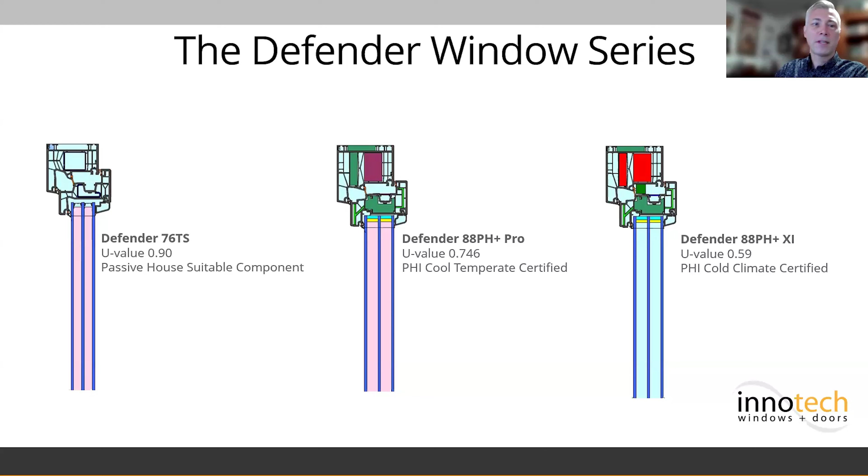Given our niche market, we know U-values. In fact, we'd like to think that our U-values are fairly impressive. But time and time again, we will hear the following: manufacturer X has a lower U-value. Well, do they really? Maybe, maybe not. Let's take a look.

So our goal with any high performance building is to limit the thermal loss from the inside of the building to the exterior. Heating or cooling the buildings, we don't want to heat or cool the outside at the same time. The U value is measuring the heat flow through the window, so the lower the value, the better, because that means less heat is flowing through.

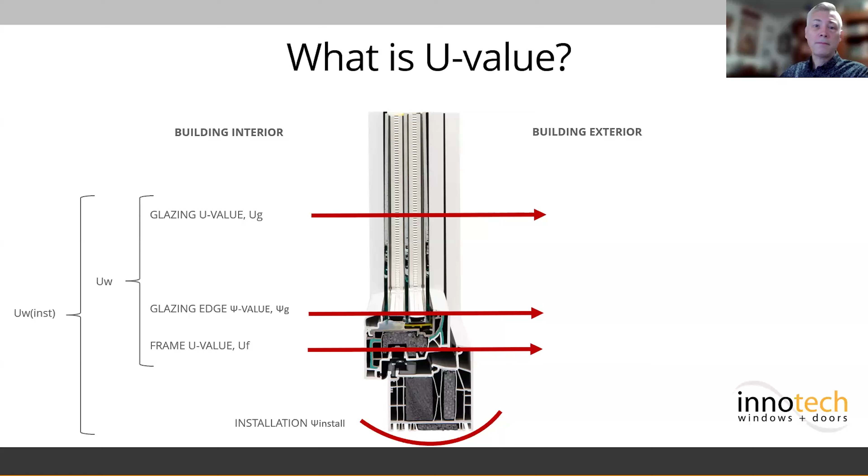The UW, the window value, measures the insulating value of glazing, glazing edge, and frame. UW installed includes the installation value. We'll chat a bit more about that later.

So first things first, we do need to understand U values and how they're determined. Here in North America, we may encounter 3 different ways to calculate U values. Those systems have different surface films, different boundary conditions, and they follow different methodologies for calculating U values.

Note in here, so we've got NFRC, which is the North American system - it actually references an ISO standard for calculation, but a different one than what the Europeans use. It's a very comprehensive calculation procedure based on heat transfer relationships solved using numerical methods.

And it also uses, of course, these different boundary conditions. So we're talking 0 degree Fahrenheit, minus 18 Celsius, up to 21 Celsius, which is 70 degrees Fahrenheit as the interior temperature. It's a very broad temperature range compared to the typical European ISO, which is 0C or 32 Fahrenheit up to 20C, 68 Fahrenheit.

And then Passive House has a very similar system to ISO with some slight variations and different boundary conditions again. So we're going with a frame evaluation at minus 10C, which is 14 Fahrenheit. And the IGU is actually evaluated, depending on what climate it's evaluated in, down to minus 7C or 20 Fahrenheit.

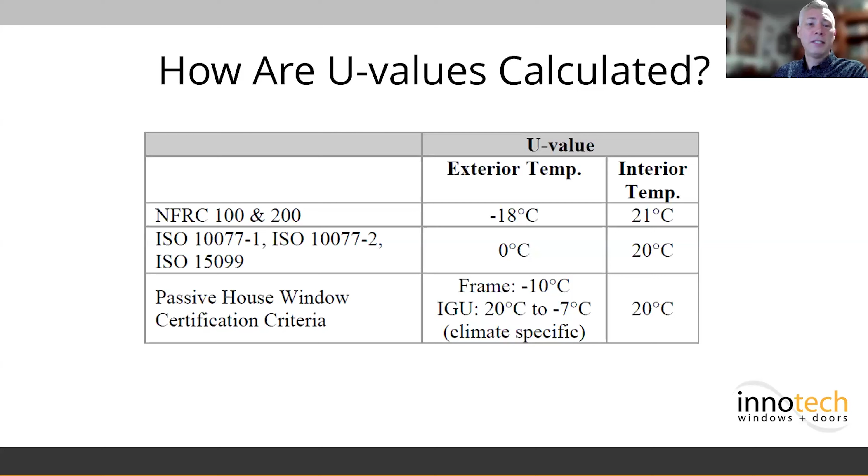So there are some differences in there, and they will alter the effect when we thermally simulate. Another thing to note is that NFRC evaluations are always whole window. They are looking at a fairly complicated window, but they are taking a specific glazing configuration in the frame all at once, so you get one number for that product.

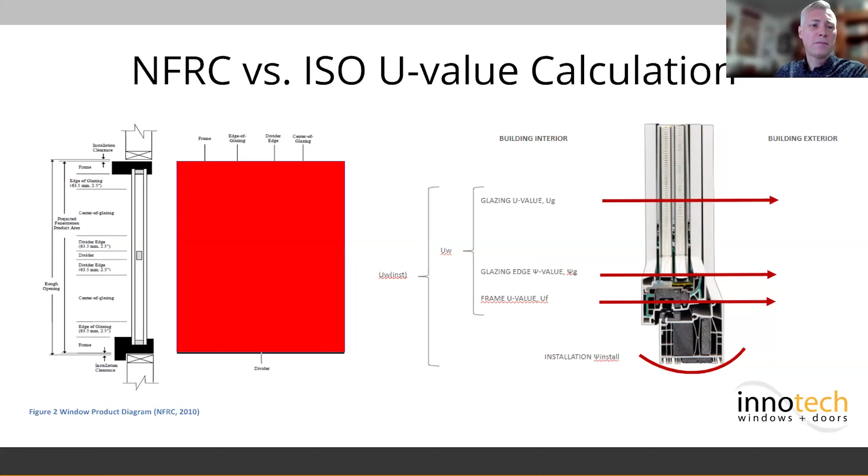ISO, of course, the procedure simulates the U value by putting a standardized panel, a calibration panel, at 0.035 watts per meter Kelvin. And it standardizes the conditions. You get your U frame value, you get your glazing edge value, you get your glazing value, you get an installation psi value, and all of those different parts are put together in the final product.

And when we talk about solar heat gain, interestingly, it's also evaluated differently based on NFRC, ISO, or PHI. So they have different boundary conditions. The exterior temp is going to be 90 Fahrenheit or 32C or 86 Fahrenheit for the European evaluations. The interior temp is very, very similar.

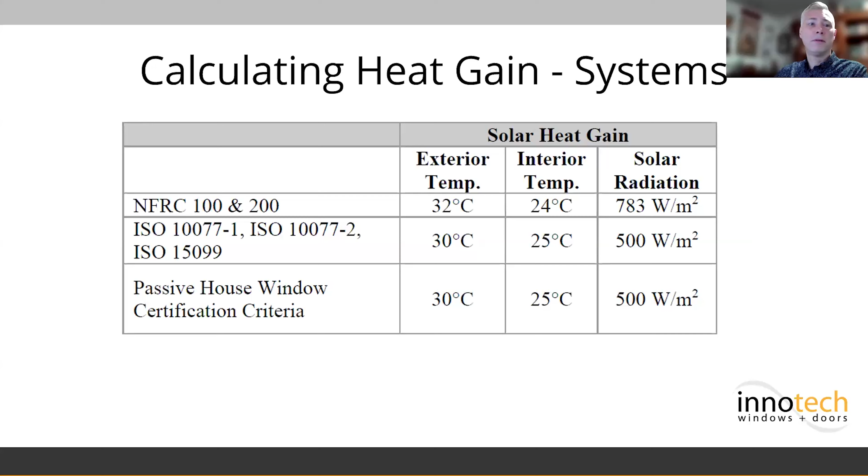Another thing that's a big difference is they have a different incident solar radiation. So they actually compare using different incoming heat values. So you will find different numbers, even with that seemingly simple calculation. As with U value, NFRC solar heat gain is a whole window value.

So that's an important difference since center of glass values are higher than whole window values because of the opaque frame area reducing solar heat gain when you look at the whole window. So NFRC evaluates the whole window. The European ISO can evaluate the whole window or center of glass. Passive House only evaluates from a center of glass.

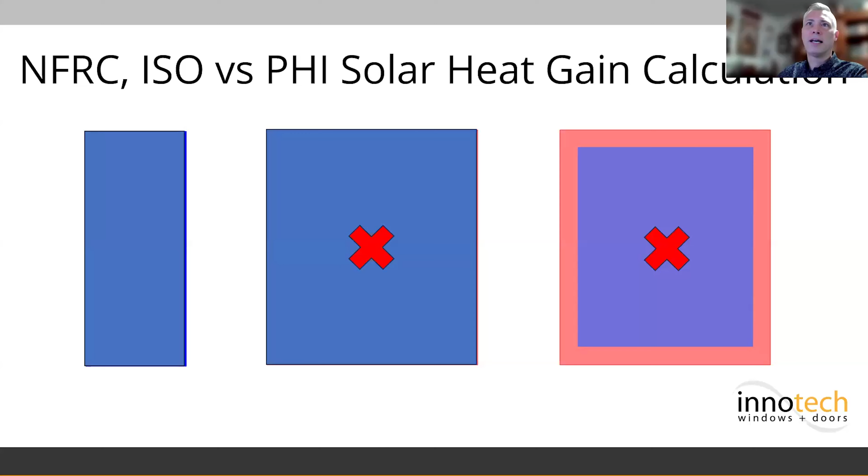Now, does size matter? What's interesting when you take a look at the NFRC evaluation method, smaller windows will generally tend to perform worse in energy evaluations or heat loss evaluations because there's less glass, and the glass typically outperforms the frame. So windows that have smaller frames will actually look like they perform better in NFRC because they have a higher glass to frame ratio, but those small frames are likely to have poor thermal performance.

So that's probably not what you're going to be looking for if you're designing or building to a higher performance standard and paying attention to surface temperatures, condensation risk, that sort of thing.

And the size that the products are evaluated at - if you take a standard window size, NFRC only uses this specific size, this narrow little arrow slit window: the 23.5 inch by 59 inch NFRC standard window size. The Passive House International standard window size is 48.5 inch by 58 inch.

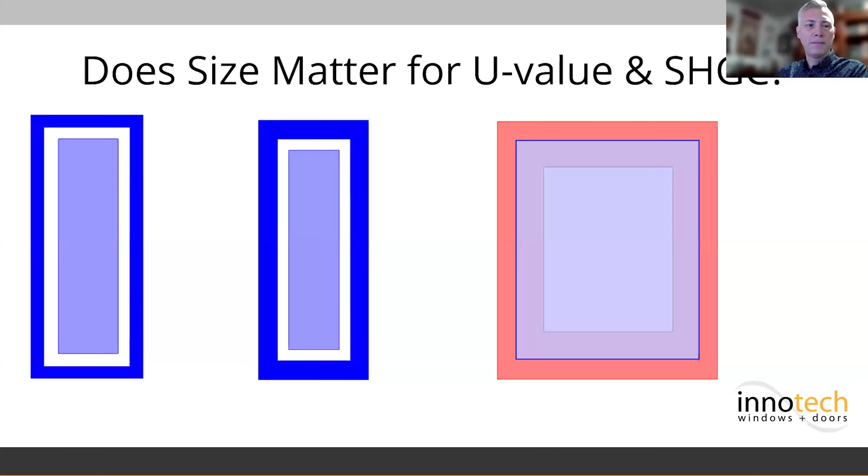And in my experience, that's a much more realistic to project delivered size. So I think you will get a more realistic value from a UW using the Passive House method.

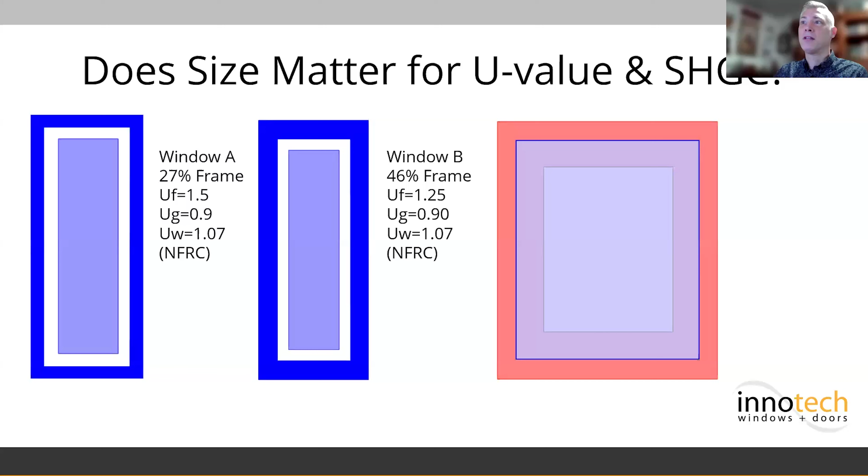A couple of numbers to this, you may find interesting. These two different windows: window A is a fairly standard North American frame, about a 27% frame in the evaluation, with the U frame being 1.5 watts per meter square Kelvin, versus window B having a 1.25 value. They actually end up being the same overall U value with very different frame performance, just because of that disadvantage. You can see how much more the frame takes up of the whole.

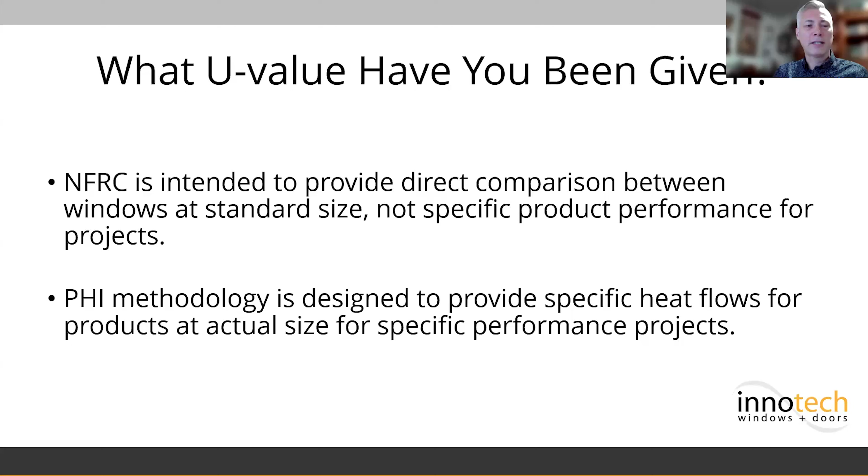So what are the differences in the evaluation methods, and what impact does that make? I think it's important to ask yourself what U value have you been given. NFRC is intended to provide a direct comparison between windows at a standard size - it's not specific product performance for projects, it's apples to apples. PHI methodology is specifically designed to provide specific heat flows for products at actual size for specific performance projects. Very different intents, and as a result, different outputs and results.

Now that we've taken a look at how we evaluate window performance, let's dive into the question of glass panes. Single pane is one piece of glass. Dual pane is not one, but two pieces of glass. Triple pane - I'll let you all take this one.

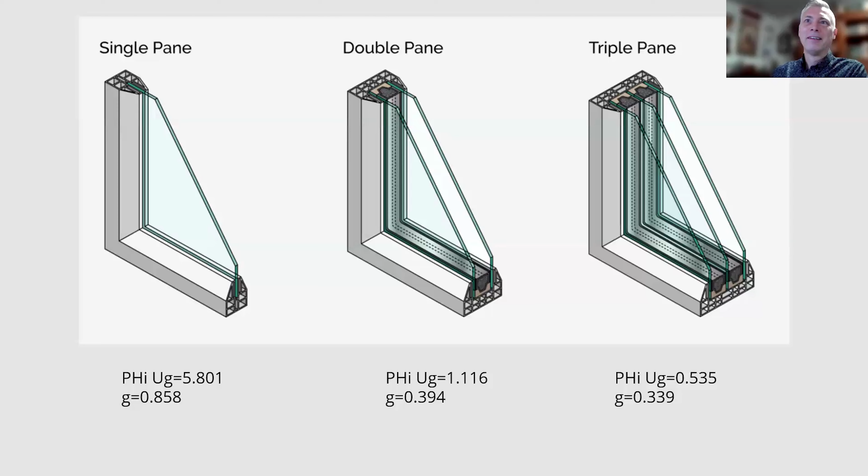So what is the difference between an IGU with two pieces of glass, one coat of low E, and an optimal cavity filled with argon on the left, and an IGU with three pieces of glass, one coat of low E, but squeezed into the same cavity or space as the double pane unit? The double pane unit significantly outperforms the triple. The takeaway is that we should never assume performance based on the number of panes inside an IGU - there is quite a bit more to it.

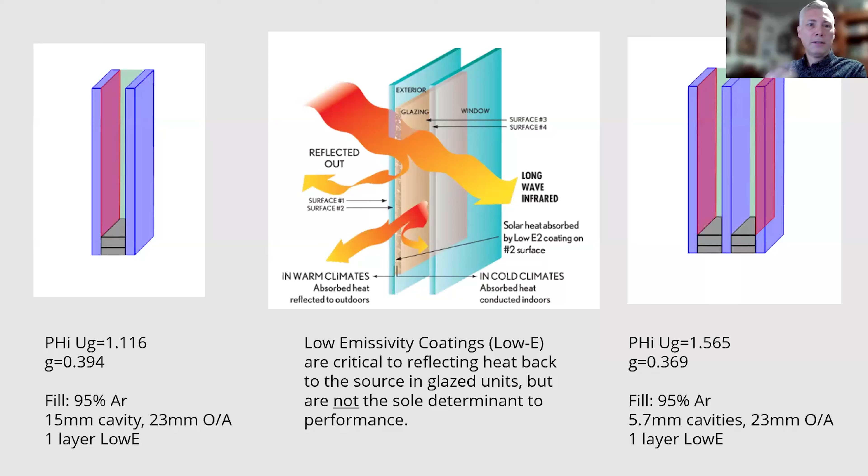Low E coatings are critical to reflecting heat back to the source in a glazed unit. They're not the sole determinant of performance, but they are very important. So if we take that triple unit and add a second coat of low E, will it now magically outperform the double pane? Nope, it's still bad.

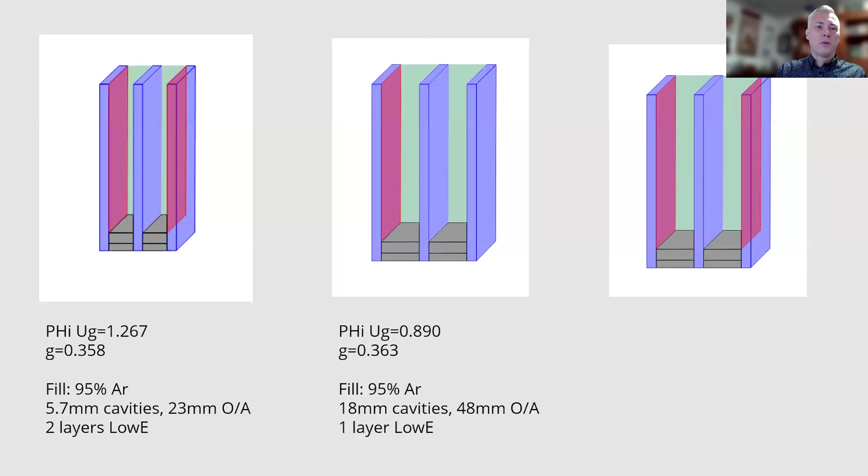But what if we optimize the cavity in the triple unit with one low E? Actually, yeah - it's about 25% more thermally efficient. Not amazing, but quite a bit better. Increasing the cavity depth is more important than adding a second layer of low E. But optimizing the cavity with two layers of low E - boom goes the dynamite.

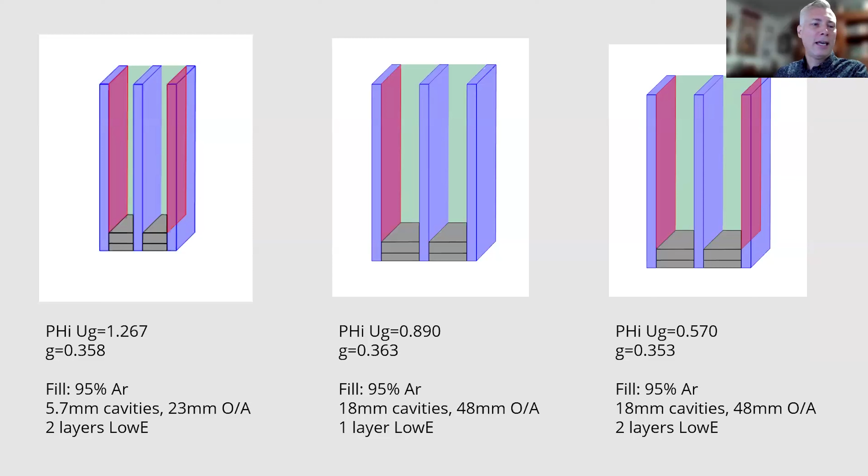What happens if we add thicker panes of glass? That's actually problematic because it drops the cavity depth, which decreases unit performance. So thicker glass, while handy for acoustic performance, can be problematic for the overall thermal performance of the unit. You can see how different things are intertwined - it gets very complicated, and it can take a bit of a balancing act at times to come to the right decision.

Now, what happens if we add an additional coating of low E on each unit, giving us 2 layers of low E on the double glazing and 3 layers of low E on the triple? Now we get something really intriguing.

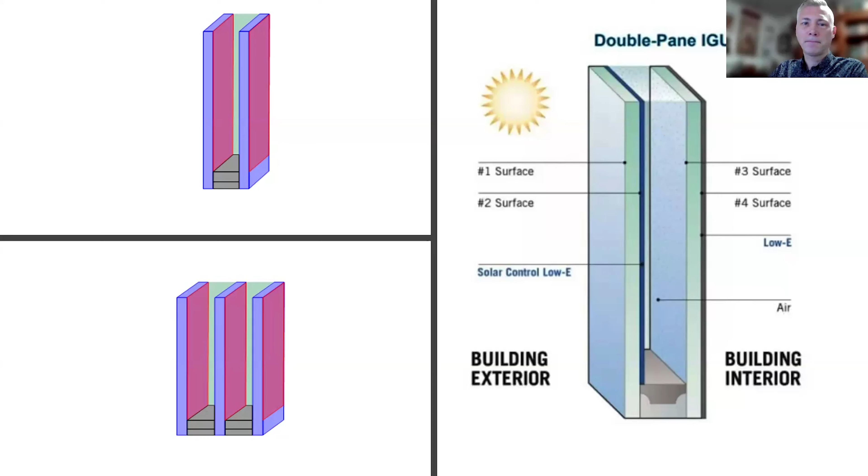When we put a reflective coating on the interior surface of the glass - if you look at this large version on the right, you can see that low E coating, it's a reflective point, it's actually in front of the glass. So we're stopping the heat before it can enter that pane of glass on the interior side of the window. That affects the temperature of the glass - the glass doesn't get heated up by the interior, it gets heated up by the exterior. The surface temperature will drop. And by how much?

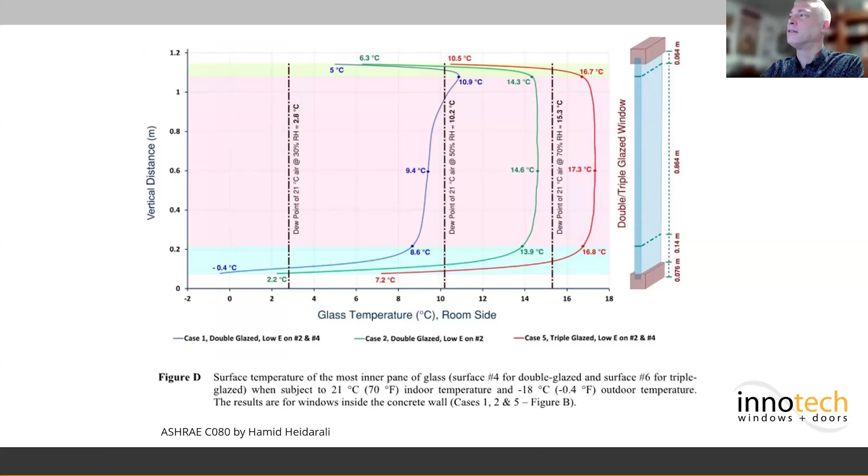It's not constant. The red line here is a triple glazed unit with 2 coats of low E, so it does not have an interior surface low E coating. The dew point at 50% RH is 10.2 degrees Celsius, and you can see the entire window, other than just the very bottom, maybe a 1/4 inch, is above that dew point. The green line is a double glazed window with low E only on surface 2.

So that's one coat of low E, and that one is staying above the dew point other than just the barest edge at the top and a little bit, maybe an inch down at the bottom. So this is very warm, and the vast majority of the window is at 14 Celsius or higher. This is a warm surface with no risk of condensation.

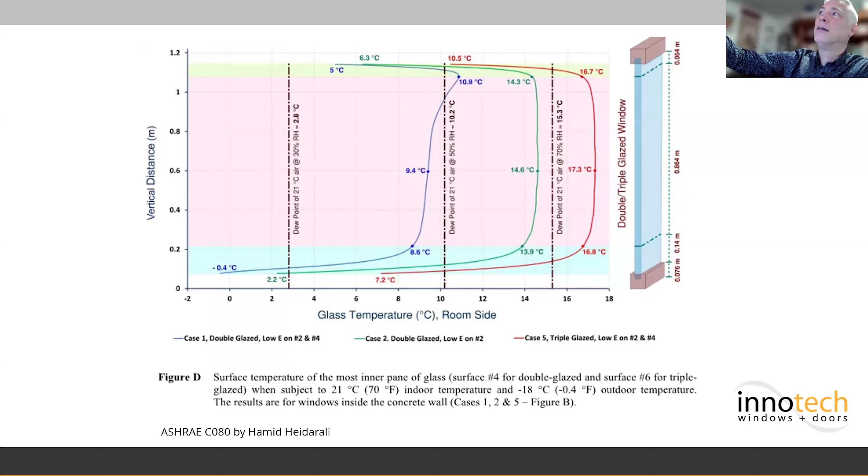But the double glazing with a fourth surface low E coating, all of a sudden you can see at the very top edge of the window, you've got a short area that is slightly above that dew point, but almost all of the balance of the window is actually going to be below the dew point and have a risk of condensation. It's also got an average center temperature of 9.4 degrees Celsius, which unfortunately I can't remember off the top of my head.

What is that, 45, 50 degrees? Yeah, but regardless, it's significantly below that radiant asymmetry sensation point. So this glass will feel cold.

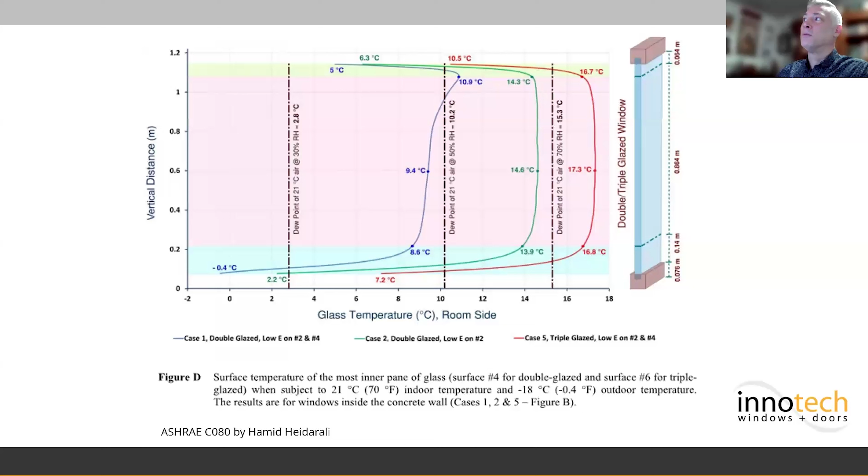This is another study, done from BC Housing, a home in Vancouver. This one isn't about interior surface coatings, it's just about the effects of high gain glass. So to be able to achieve high solar heat gain coefficients, generally you have to reduce the reflectivity of your low E coatings.

So you will see some slightly higher temperature variations on a regular basis. The glass will be a little bit colder in the wintertime versus a high heat rejection IGU, and it will be considerably warmer in the summertime, because it's allowing lots of solar heat gain. This is for a home in Vancouver, which has a ridiculously mild climate by Canadian standards, and it actually shows that the interior surface temperature of the glass will range from 10°C, 50 degrees Fahrenheit, to 35°C, 95 degrees Fahrenheit.

Our sense of radiant temperature is actually the dominant factor in comfort. That has been shown to be somewhere between 40 and 50% of our sense of temperature. So this is going to have a significant impact on occupant comfort. Air conditioning is unlikely to affect those high temperatures, nor is the furnace going to affect the low temperatures. And our aim should not be to use heating or cooling to override the effects of what is possibly a questionable glass choice.

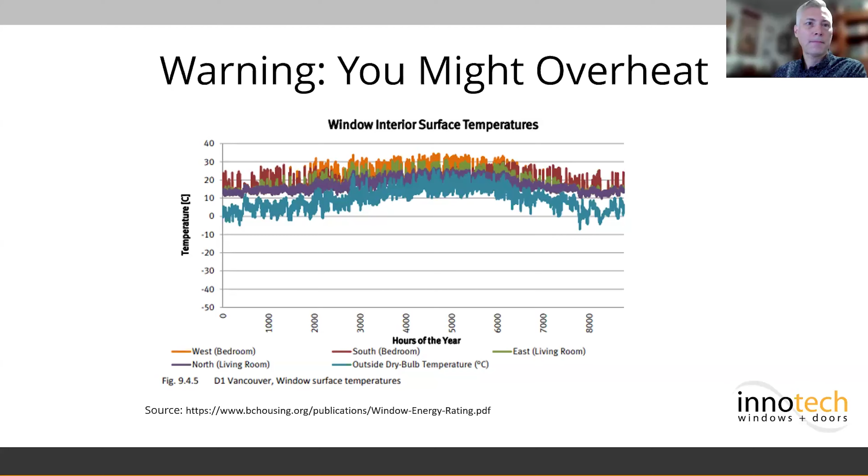And then, because when you purchase a window or door, you're not just purchasing an IGU, you've got a frame, and that matters as much or more than the glass does. So a low U value does not guarantee any of the following: airtightness, durability, embodied carbon, affordability, water resistance, comfort criteria, U installed, hygiene criteria, or structure. In fact, low U values may be an opposing concept to some of these, like structure.

And so it needs to be carefully evaluated on a project by project basis. When we focus only on the IGU or the U value or the solar heat gain, we overlook other important performance metrics. So in today's presentation, we won't dig into all of these topics, but we're going to quickly address the following: airtightness, embodied carbon, affordability, comfort, and the installation U value.

No matter your performance targets, airtightness should be part of the evaluation criteria for the windows and doors, and arguably one of the most important. It's entirely possible that a window with very good U values has terrible airtightness. U value isn't a metric of overall quality.

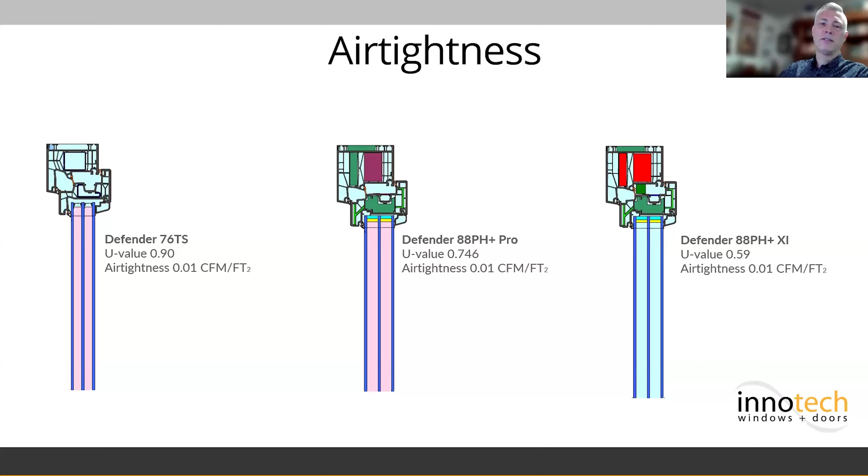It just measures the heat flow, and it typically measures it just in a simulated form. So don't forget, it is possible for operable windows to achieve airtightness values that are the same, or in some cases better, than fixed windows. So unless you plan to design or build with only fixed windows, make sure to pay attention to the airtightness for both the fixed and the operable.

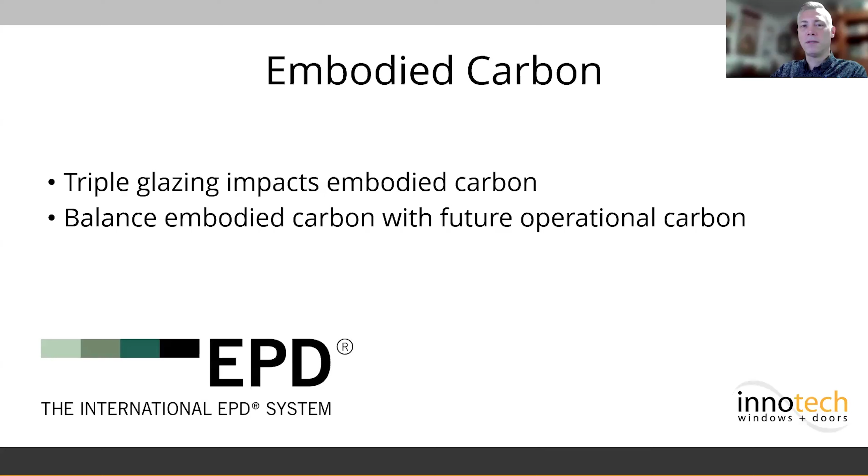Now, embodied carbon. This is a very important consideration. If sustainability is a true goal, this is another metric to consider and balance with all of the others. It's important to balance the embodied carbon with the future reduction of operational carbon over the lifespan of the project.

We recently published our EPD, our Environmental Product Declaration. This is a chart that compares our products, in orange, to industry averages, shown in blue.

Adding a third pane does impact the embodied carbon. In fact, glass is the largest source of embodied carbon in the window, as it's the heaviest part of it. Operating windows also have greater embodied carbon than fixed, due to the additional sash, more frame, hardware input, and other things that increase it.

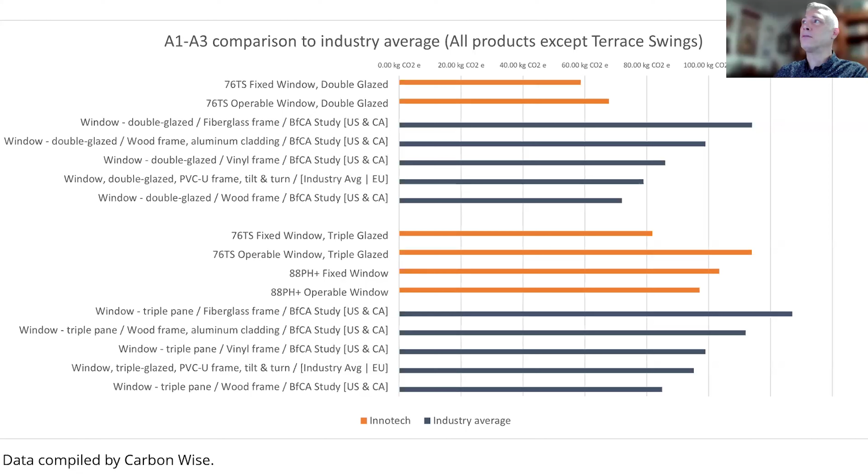But the numbers are fairly interesting and were a little surprising to us, to be honest. We came out looking a little better than we had hoped. I think it's great.

Triple pane windows and PHI certified windows are most likely going to be more expensive than the average window, so affordability can become a question. Better performing products cost more, but are they always necessary? In our quest for low U values and better buildings, have we lost sight of evaluating window requirements on a project-specific basis? Let's take a look at two very different projects.

On the left is the four-story Mercy Greenbrae apartments in Lake Oswego, Oregon. This is a 100-unit, 100% affordable housing development. It's a high-performance building that is PHIUS certified.

On the right is a single-family duplex in the city of Vancouver. It's still in the design phase, and it plans to meet the Vancouver Energy Code via the performance path, which requires a TEDI of 20 kilowatt hours per meter squared annum, a glazing maximum U value of 0.25, and a greenhouse gas intensity max of 3 kilogram CO2 per meter squared annum.

Both projects carefully considered and balanced their project requirements with their budgets. The Mercy Greenbrae apartments were able to meet PHIUS targets with our dual-pane window system by ensuring the wall and roof assemblies met the required standards and by achieving very high air tightness targets. We'll put a link in the chat that digs deeper into this project.

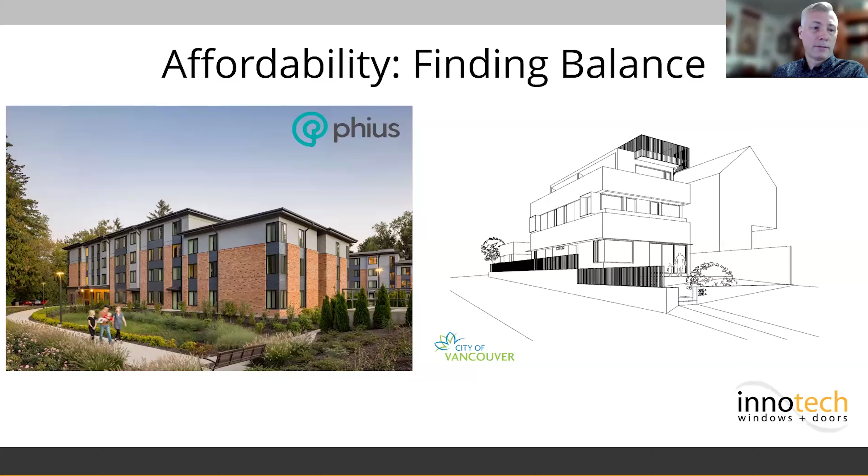Now, jumping into installation: can you affect the window's overall U value through the install position and method? Well, absolutely, and as you might guess, it also means you can negatively impact your U values. A few years ago, we asked RDH Building Science to model 6 different wall assemblies with our Defender 76 TS system, and the results were interesting.

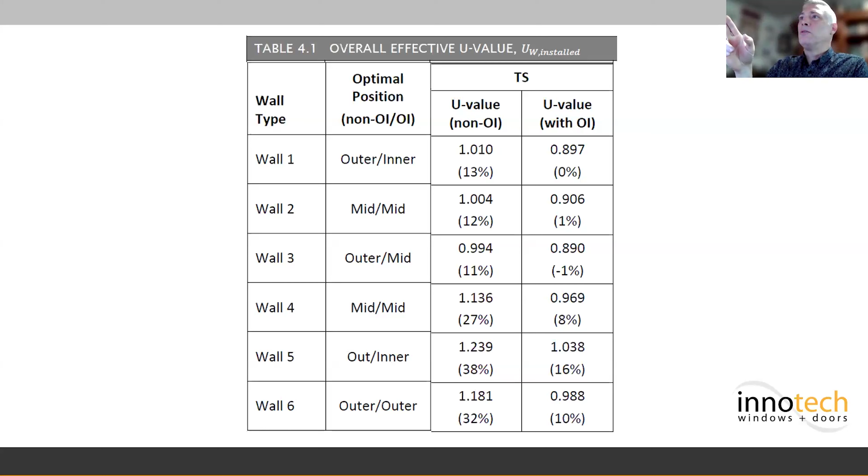Notably, the optimal position of the window varies based on the wall assembly. You can see that in the second column here, optimal position. The optimal position will vary depending on whether it's an over-insulated frame or non-over-insulated frame. Sometimes it's the same, but sometimes it's different. Over-insulation of the frame can affect this.

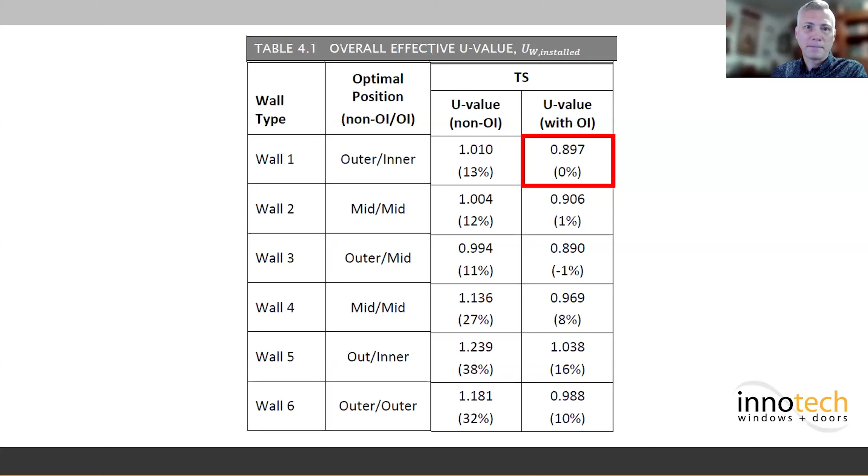So we have a perfectly optimized window install, where the window after install is exactly the same as it was beforehand. We also have a window that improved after it was installed; once it was properly placed and slightly over insulated, the total value of the window actually improved.

We also have a significantly worse window after install. That, in my opinion, is a terrible jump — a 38% decrease in thermal efficiency is massive. This one here shows kind of a poor install compared to its optimized version, a 22% difference between the two.

So it definitely pays dividends to pay attention — it's still not great, unfortunately. For this last one, what I'm trying to show here is wall 5; even though it's not great... oh, yeah, I put the box in the wrong spot, sorry. I wanted to show the optimized, over-insulated, best-you-can-get version on wall 5.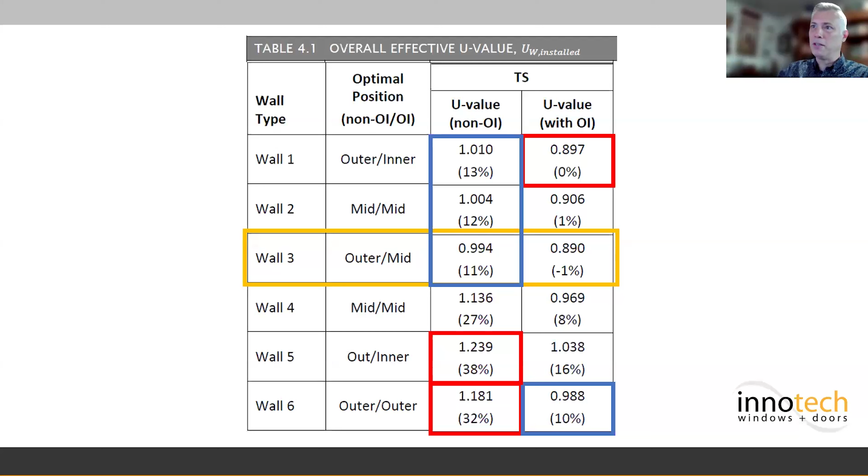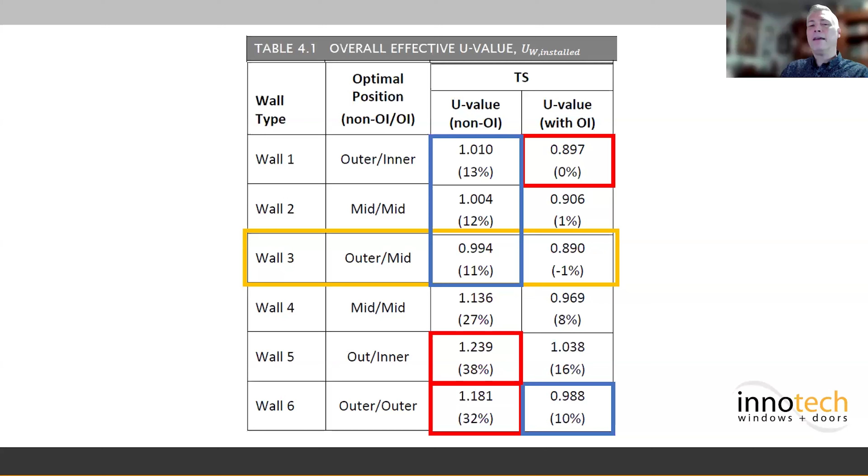You can have non-over-insulated versions on these top three wall assemblies, wall 1, 2, and 3. Those installed values are quite a bit better than wall 5, the best you can do. That probably means wall 5 is a problematic assembly when it comes to the openings. Even though the wall itself looks very good, because it has difficulty in detailing, it means you're going to have difficulties delivering a project that performs the way you hoped.

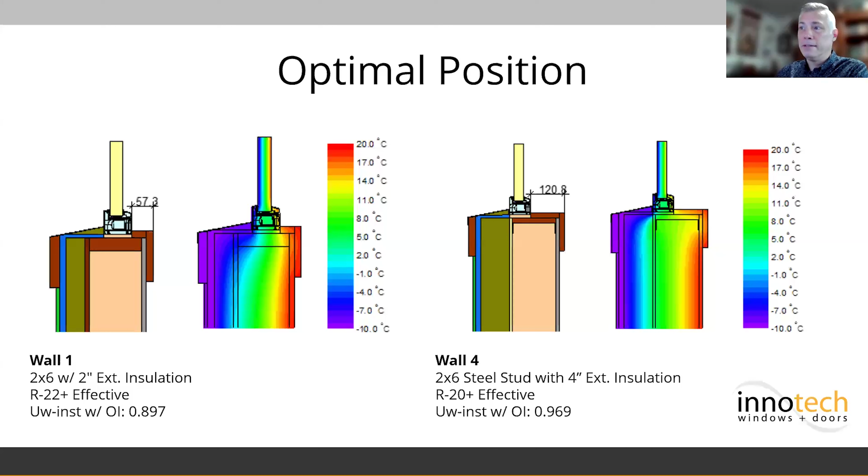So what these different wall assemblies are: we've got 2x6 with 2-inch exterior insulation, R22 plus effective. Next to it is a 2x6 steel stud with 4-inch exterior insulation, R20 plus effective. This one is really interesting to throw side by side, because using wood framing with 2 inches of exterior insulation you get R22 plus, but with the same size wall using steel, you have to throw 4 inches of exterior insulation on and you're still only R20 effective. It makes a huge difference to just change one component from wood to steel.

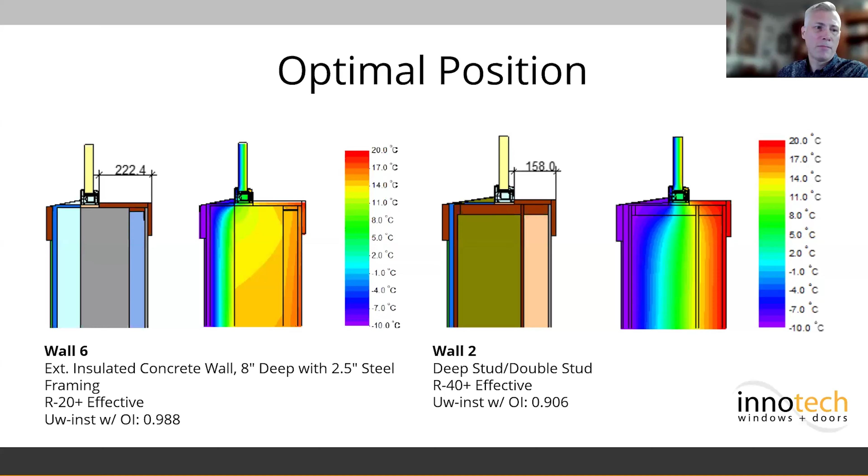Over-insulation is almost always a good idea. It's great, but again that can depend from project to project on how easy it is to over-insulate, what the cost is going to be, and how much it really improves performance.

While we're focused on U-values and solar heat gain, it's important not to lose sight of those other performance metrics, or worse, to assume a higher quality or performance as a result of a third pane. Each of these is a singular metric of performance that can affect each other, but by no means should any window be specified or compared solely on one metric.

Finding the balance for each project is key. That balance will most likely differ based on the project's unique requirements—performance targets, climate and geographic conditions, budget, and aesthetic considerations.

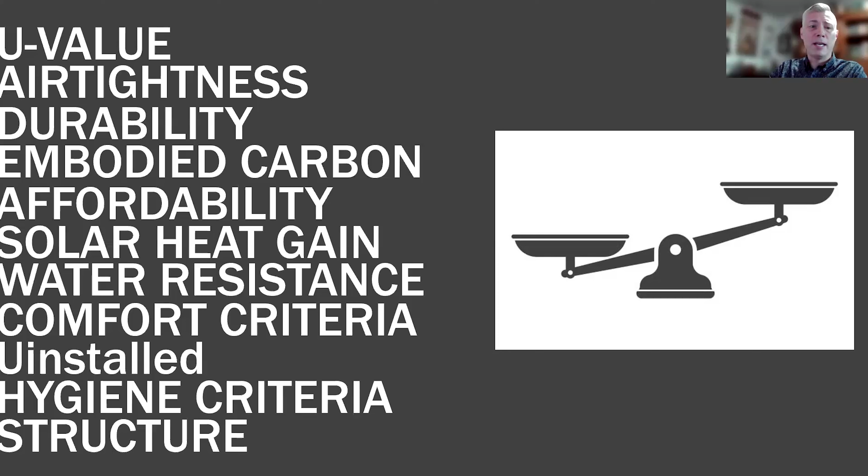So that's the end of the presentation here, and I'm hoping there's going to be a couple of questions.

I asked two questions, but I think the first one was about the outdoor boundary condition, if I'm not mistaken. My understanding, and correct me if I'm wrong, is that choosing 0 Fahrenheit for the outdoor boundary condition favors a narrower glass package because of convection overwhelming the insulating value. Where in the country do we have 0 Fahrenheit for any appreciable amount of time? So what's the justification for choosing that—basically, European windows perform better because they're tested at a more realistic temperature?

Isn't that right? I mean, that's definitely a climate zone specific question. There are some pretty vast swaths of both Canada and the United States that do see very low temperatures on a regular basis through the winter. So I would say -18 is realistic for a lot of those areas. Of course, if you're talking along the very highly populated East Coast, that's probably colder than necessary, but for the Northeast, it's going to be a realistic extreme test—you would say you will hit those kinds of temperatures.